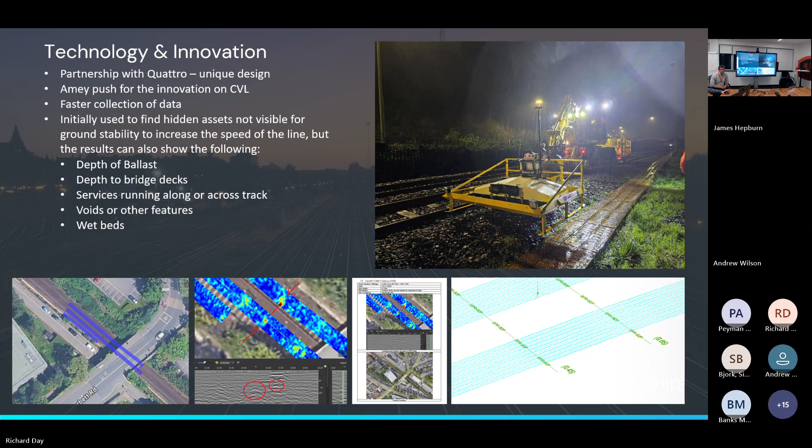One of the main reasons for that development that Mike was just talking about is the amount of limited time that we're actually getting on track now. The amount of time we get in possessions is becoming so short. In some areas, we get as little as half an hour, maybe, other areas, particularly around Bedford recently, you're lucky to even get an hour and a half, 2 hours on some of the lines there. So there's a real push to collect as much data as we can in that time.

From a client side of things as well, we're also hearing a lot of talk about a minimum viable product, about cost cutting, what's the minimum amount of information they need to be able to get the job done. The whole survey-once-use-many-times approach is maybe slowly going by the wayside, possibly.

This has led to other interesting developments with the Amberg trolley systems we're using, because the decision between how much data we need and how much time we've got available isn't as uneven as it potentially was a few years ago. We've got a couple of systems developed by Amberg Technologies, the IMS 5000 and the IMS 3000. It's essentially the same kind of trolley system, but set up in different modes.

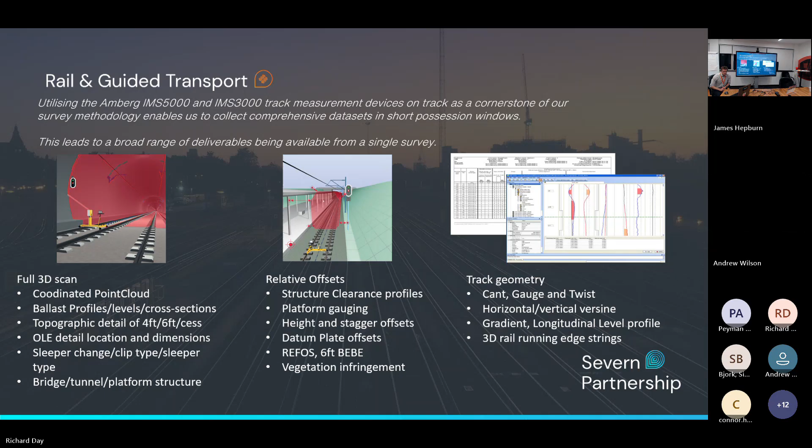So a little example of what we can do with this sort of technology, before we move on to more of it, is a project we ran in Skelmersdale. We've obviously mentioned all the survey control which we need to do traditionally - that's the basis of all surveys, like Rich said.

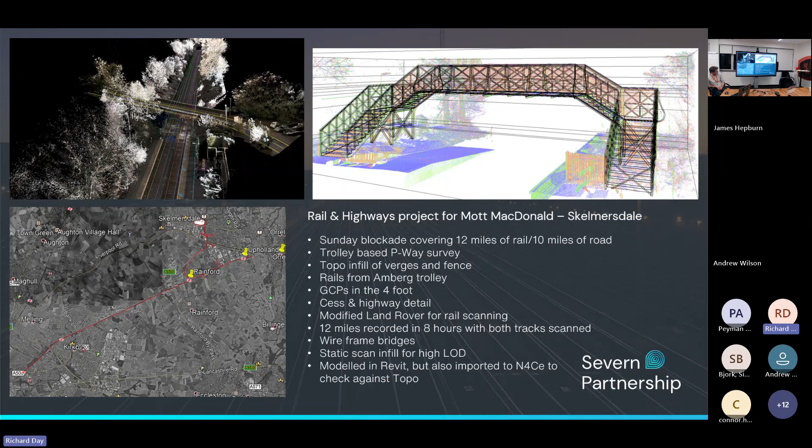If that's not right, the whole survey is not right. So once we got the control in, we managed to survey around 12 miles of rail, 10 miles of road, all in one Sunday blockade with all this kit. So you can see how rapid this data collection is.

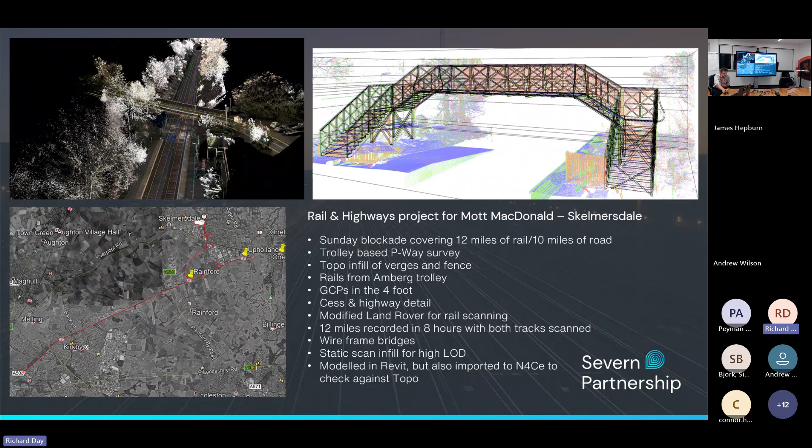We had the Pegasus 2 Ultimate - if we go onto the next slide, on that, the third image across, you can see it on the back there. We were able to scan all the roads while the possession, the blockade, was coming into fruition, and then scan all the rail as well.

Obviously that isn't for track accuracy - that was more because there's quite a few embankments and things, so that was more for the imagery and everything like that. But what we did at Skelmersdale, just because of the good possessions and good blockades, we used a number of different equipment to prove what point cloud data and these different systems can do in terms of platform gauging, track alignment, and also clearance gauging.

So for platform gauging, we used as the baseline the Bance platform gauge - the old traditional, we've all seen that handwriting. What we did then was use the IMS 5000, the Pegasus 2, and Fugro's RILA system, which unfortunately is no longer in existence, as a bit of a benchmark, and we did a whole report on it, down at the bottom.

Same with the track alignment - we used the Amberg GRP 1000, which is a total station track trolley, so that's the most accurate system, against the IMS 5000 and the Pegasus 2. And for clearance gauging, that's the 5000 against the Pegasus 2 and the RILA system.

What we found, especially with the platform gauging, is Network Rail wants to see the platform gauge as the number one - that is the go-to, the holy grail of platform gauging, which was fine, we did it against there. But unfortunately, what we found was all the other systems didn't match it quite as well, though all the other systems matched each other very well.

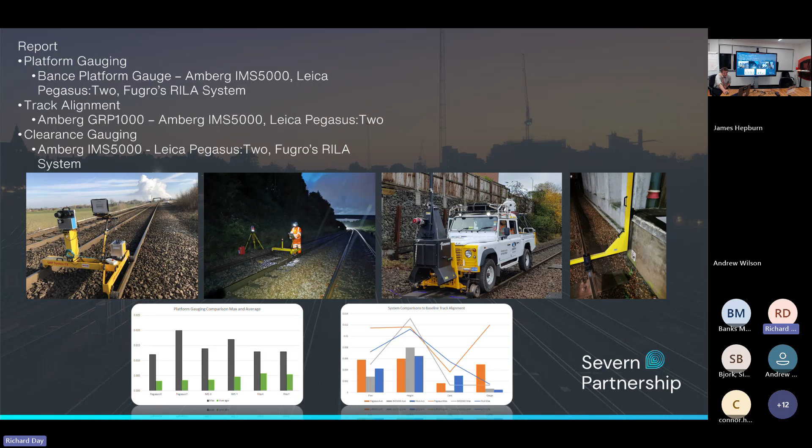So I just thought we'd go a little bit over highways and bridges. It's not necessarily on track, but it's a lot of assets within Network Rail, through over bridges and things like that. Like we mentioned, we're still very much focused on limited time, boots on the ground, trying to collect the large data sets and bring it into the office into a safer environment. But again, even with highways, the first thing you've got to think about is ground control, but not as much as track.

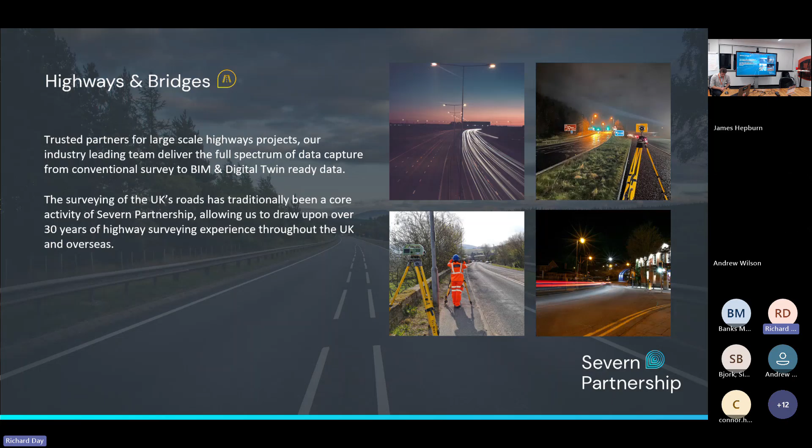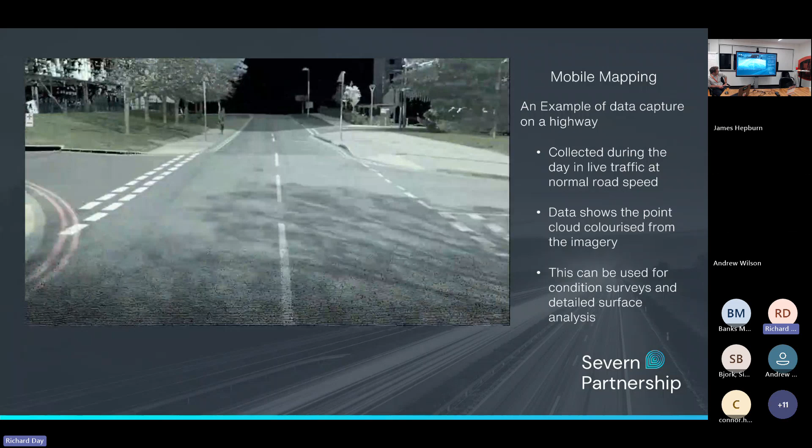If we go to the next slide - so the mobile mapping system we showed before. This is the sort of data you can collect. The colour's not as good on there, but it collects 360 imagery as you drive along, so you get a point cloud and the 360 images, which you can combine to get this nice looking data set. We can use this on track as well, which we did at Skelmersdale, for example. The benefit of using the Pegasus system is you could drive that along a road or on track at any point with no ground control and still be accurate to about 20-25 mil in global accuracy.

If you put ground control in, you can bring that down to 10-5 mil, depending on how much ground control. But the relative accuracy is always less than 5 mil, depending on point spacing, because every time it does a rotation profiler, that's one relative measurement. So if you measure from curb to curb, that's always going to be less than 5 mil. So this is the difference between relative and absolute accuracy - you've got global accuracy of where it sits in the world, so that's 20 mil driving along, but the actual measurements within that data set from curb to curb is sub 5 millimeter.

All the mobile mapping techniques, whether it's the trolley, the GPR data, or the Pegasus data here, they all essentially work on a very similar methodology. You're getting a trace of a centre line, a trajectory, to which all the other data is stitched. So everything is then relative from that point, and the only thing that positions it is where that trace is.

A benefit of this - for example, we did a lot of work down in Kent for level crossings, so there's been a lot of talk in the news about level crossings, but we managed to drive sort of 18 to 20 level crossings in a day, which ties in with the data from the track data. So we'll push a trolley at night, and then during the day we can go out with this and drive sort of 200 meters either way. If they're thinking about building a bridge or something like that, we can go a kilometer either way just in a day.

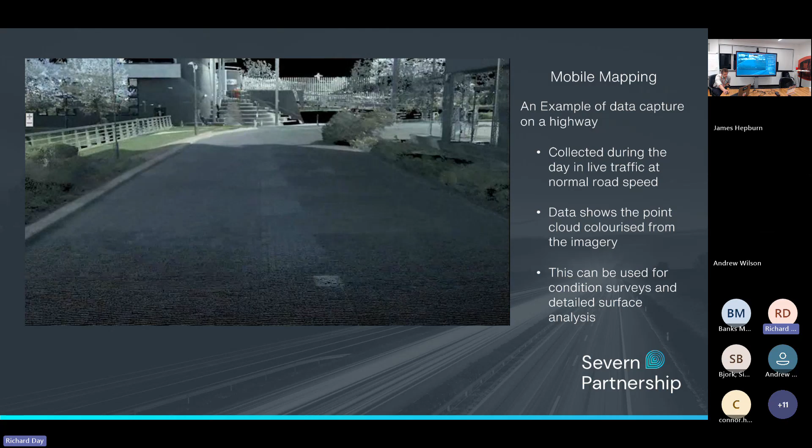Another benefit of using this system is we can also mount this on pretty much anything, to be honest. Like you've seen on our RV, we've mounted it on the back of our vehicle, but we can also mount it on a boat.

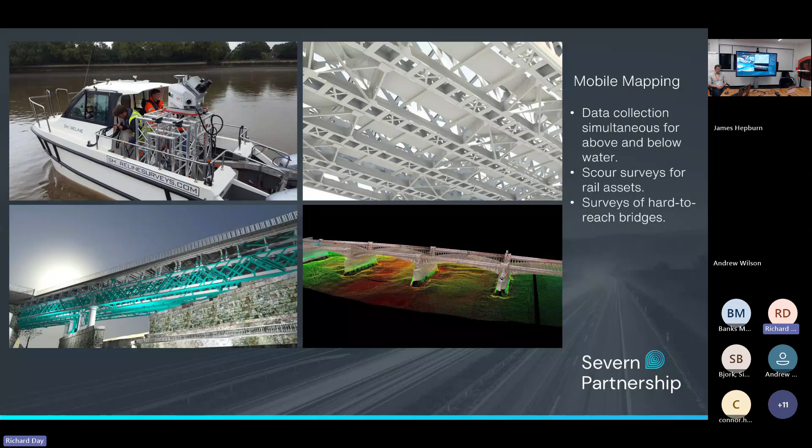So for asset management and scour surveys, that sort of thing, for us, for rail surveys - for some reason that picture's not come up. Have you sort of been a bit challenged with positioning in that itself? No, to be honest, the IMU, the inertial measurement unit, likes movement. The more movement, especially on a boat where it's rocking and moving, it likes that a lot more than being on an RV where it's nice and smooth on track. So the more movement, the smoother it can get, because it knows there's movement going on. Again, it's positioned with the GPS.

But we teamed up with Shoreline - this is Usk Viaduct, just outside of Newport Station. They wanted a bit of an inspection, which you can do with a drone - fly around and get a few images - but they wanted the whole thing modelled, with, at the time, the OLE going in. So we were able to get the multi-beam for under the water there, to see the scour around the actual structure, but also get all the point cloud data. We did multiple passes, trying to get into various locations. The profile there, you can see it's a 45-degree angle, so we can move around and twist the scanner in different positions just to try and get into all that metalwork. We were able to model that - you can see that's the model we created for it at the end.

We do have occasional issues. We did this on the Thames for a lot of the bridges, and we went past the MI6 building. Didn't realise at the time they've got a lot of GPS blockers, and the data went mental - it just went everywhere, like 200 meters. The road just went smooth and then went directly north into the air, obviously, because that's what we want - with any missiles, if it comes in, just fire them into the sky. So there are some limitations to that side of things as well. You need to know who you know, bizarre - yeah, that's it, we had to get some contacts and say, can you turn it off for 5 minutes while we do this bit.

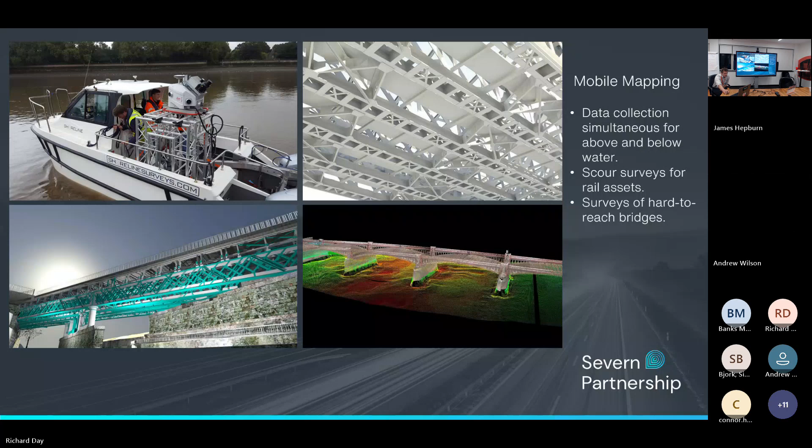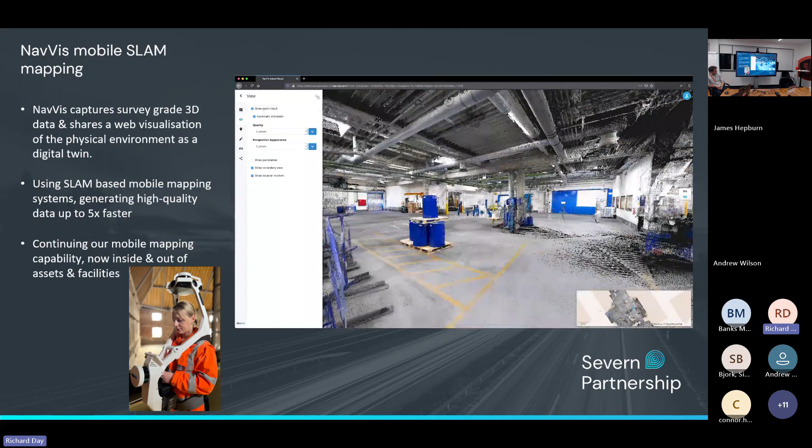So another system which is very new, starting to go with SLAM systems. This is now laser scanning, but being able to wear it on your person now and do a lot of stations. It was initially built for manufacturing, but we're starting to see benefits of using it - for example, in a lot of stations, that's definitely a massive benefit for it. But also using it in surveys on highways where there's probably a bit more theft, for example, being able to reduce that down by being able to just walk around, laser scan, get a 360 imagery, and you've got all that at once.

Another benefit of being able to use this is you can host this data online. So you don't need the software anymore to be able to use this point cloud data. If you want to use it in your own software, you can do it off the online portal and export the point cloud and use it for whatever you want.

You can use a shared login for this, and we can set you up on your own login and use that as a health and safety tool as well. So if you've got sites being built, you can put points of interest in where fire exits are, where fire extinguishers are, that sort of thing. We recently did it at Manchester Piccadilly for the relay rooms up there. We've been walking around and we can instantly share that data with about 80 people straight away.

So this isn't manually processed anymore, this is processed in the cloud. So this is where it's starting to move with the point cloud data.

So SLAM, let me remind myself what that stands for - simultaneous localisation and mapping. Basically it stitches itself to itself. So as you're walking around, you're doing a lot of figure of eights, overlapping yourself a lot, going around like that. So it uses features in itself to map itself.

But you can also tie it down to control, so as to a snake grid for example, any localized grids. It all depends on the accuracy required. If you need slightly lower accuracy, then it's good enough - if you're talking 10, 20 mil-ish, it's fine, you don't need control to do it, it can just orientate itself for what you're doing. But if you want the traditional accuracies of static terrestrial laser scanning, no problem, you can tie it down to control.

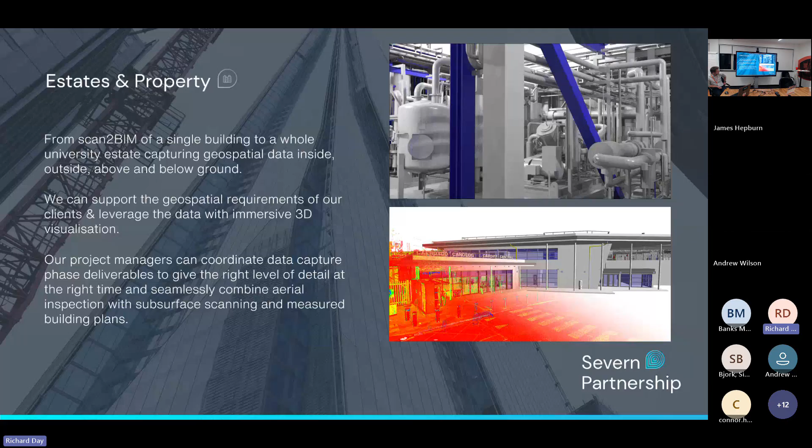An example, quite a complicated one - at the top right there, we laser scanned and modelled a Heineken factory, which was a nice job for the people over there. You can see the level of detail you can model to with the scan data we've got - every pipe, every little element. It depends on what level of detail you want, we can model to that level. You can go as simple as just walls and windows, or we can go right through to every bolt if you really needed that much detail. Again, it depends on the deliverables you're looking at.

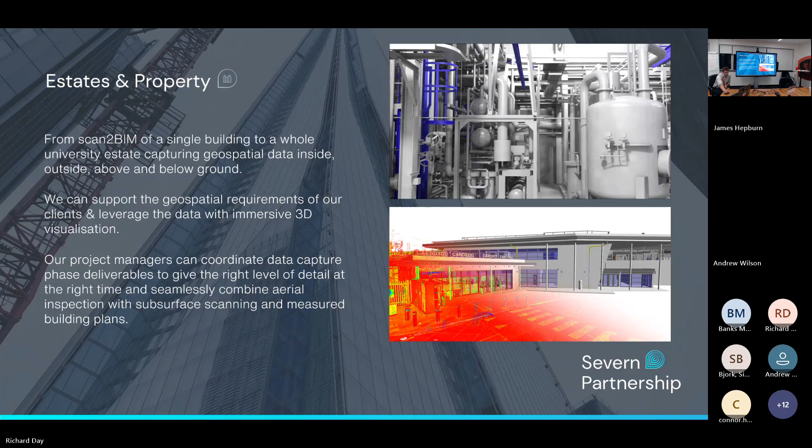So a bit about utilities tracing, which is what we mentioned before.

The problem with utility surveys is there's never going to be that much technology where we don't have to lift covers and trace them. I can't foresee anything being that advanced to do the actual physical and accurate tracing. GPR's obviously come a long way, and you mentioned drones and things like that - that will go ahead. But the actual accurate tracing, I can't see a way around it.

We have done culverts in the past, large culverts, using, instead of sending people down there for confined space, Elios drones, which is like a 300 mil ball almost that you send in there, and that can model culverts. We've done that quite a lot on Transpennine route upgrades around the likes of Huddersfield Station, where we can fly in, get the data we need, model it, and then fly back out again.

The limitation on that is if you send it down, it has to be a clear line of sight for signal, and there's only a 10-minute battery. That drone is tens of thousands of pounds, so if it goes around the corner, you've lost it, and you'll never see it again, basically.

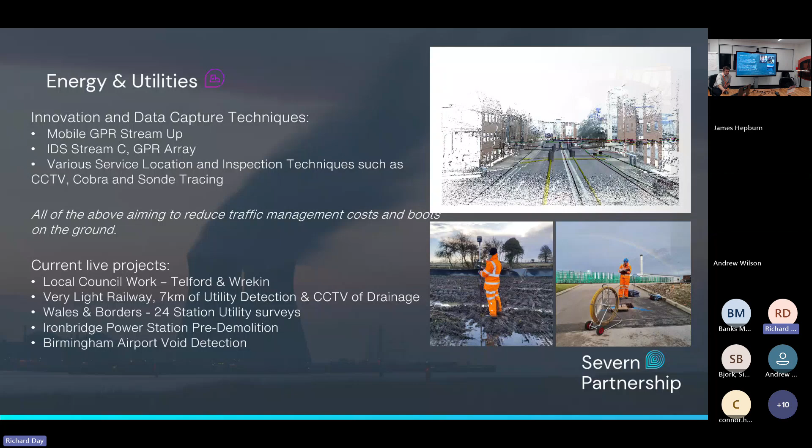So a little bit on the environmental background. We mentioned before Dawlish - we did all the survey work for Dawlish after it was wiped out a number of years ago, probably 10 years ago actually, it's the 10-year anniversary. Just wanted to bring up Dawlish because it was a great example of bringing all our services into almost one package for this job. We did a survey out to about 5 kilometers out to sea using the boat, just so hydrologists could work out how the waves would come in and hit the sea defense.

What we also found was we used the GPR on top for any pipes or services when they're building. We used the Pegasus on the back of a quad bike, another service, so we could drive a few kilometers down the beach where the sea defences were and use the GPR system there.

What we found was that the sea defences used to be full of sand when built, so when waves hit the wall it would absorb the impact. Over time it was filled with concrete, so the impact was straight on it, which started to affect the buildings behind, causing cracking to appear. So we started finding that.

One thing I discovered doing the night shift there was that the ballast is glued down. I tried to kick some ballast off a catch pit, and it went over my head because I didn't realise - it was all washing out, that was it at the time, when the sea was overtopping. But no one gave me any warning about that when I went on track, which would've been nice at the time.

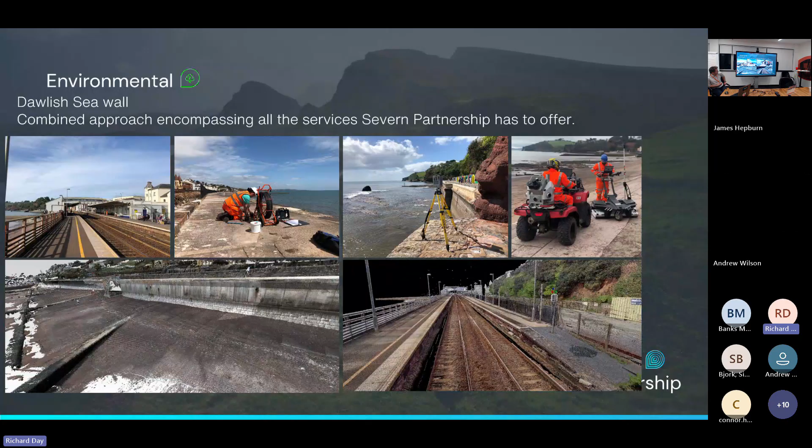So to move on to a slightly different topic now: with all these different data sources coming in, you touched on it a little bit there, they all need to link together somehow. And for the records going into the future, so that data can be used many times, they need to be on some kind of recognized coordinate system underneath it, so that's easily relatable to other data sources.

We've got mobile mapping data above and below ground, all the new construction works with machine control, all GNSS enabled now. Everything needs to be relatable to the wider world - projects aren't local anymore. And the key bit of information to that, which sometimes flies under the radar a little bit, is the coordinate systems for your projects. That really is one of the key bits that can define how well your project goes, whether it runs smoothly or runs into trouble later on in its life.

So we're just going to look at some different options, because it's not something widely spoken about, but we thought it might be worth touching on briefly. We've got loads of other information on this, so if there's more information you want on particular bits we can look at it, or if there's any questions as we go along - it can be a bit of an abstract concept sometimes, so feel free to jump in and ask.

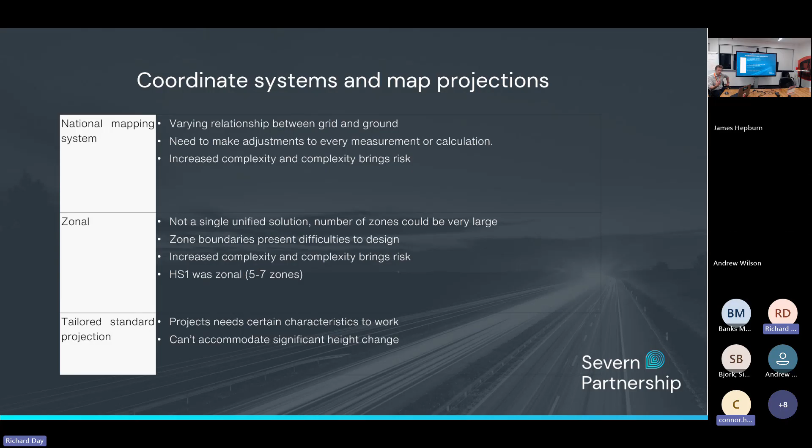And we're now - well, at the time, Jonathan Iliffe was the professor there. He came up with the solution that we're going to talk about next. He's since retired, and we're now working in partnership with UCL to develop snake grid services and offer them out.

So Jonathan came up with the concept of a snake grid. Now, has anyone worked with snake grids? Had a lot of familiarity with them at all? I think some of the challenges with keeping it accurate enough, yeah.

Yeah, so what a snake grid is, it's a winding projection. So it changes the parameters as you go along. So you give us a route and we will tailor that projection, and it twists and turns and follows the rough trend of where you want to go in plan and height to create a low distortion corridor where the scale factor and the distortion in that grid...

...is below survey accuracy. In effect, you can consider it to be 1-to-1. So if you draw that high-speed transition in the office with very particular geometry, when it gets set out, it will be set out exactly as you want it to be. There's no interface, there's no corrections as you move between the site and the office. It is completely seamless - what you see and measure in one is what you see and measure in the other.

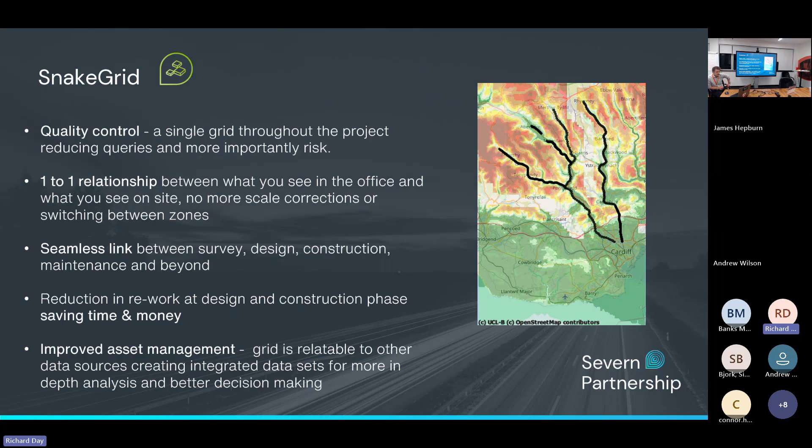And we're touching a little bit there on asset management, because it's a known, definable coordinate system, you can easily flip that into another coordinate system elsewhere and overlay data sources. I think the next slide touches on that slightly as well.

And I think there's just a little bit there about—you just provide us the details of where you want the grid, where you want it to be covered, and we streamline your workflows, reduce risk, and give you confidence in your data moving back and forth. I'm sure many of you know that pretty much most of the main lines in the UK are covered now with Snake Grids, but I was talking to Bogdan the other day, and it's almost that projects over a certain size, it's almost mandated that you have to be working on a Snake Grid now because of the benefits it brings.

Monitoring has come along quite far in the last couple of years. That's monitoring for movement, temperature, noise, dust, everything. Traditionally that was always done with a person with a total station shooting targets over and over again to look for movement. But we're now moving on to more boxes, tilt sensors, remote monitoring.

The benefit of this for larger projects is you can stick down little boxes, very tiny, about that sort of size. You can stick these on sleepers, or on posts in embankments to review monitoring. These will also be sent to the cloud, so you can have readings every minute, every 5 minutes, every 10 minutes, every hour, depending on your requirements. And depending on how long you read for, the batteries can last up to 10 years.

For longer term projects, it's cheaper than sending someone out constantly to do readings. Especially in summer where you've got critical temperature readings, on Network Rail we can just put a little sensor on the web of the rail and that will constantly give you readings straight away.

We've also got little boxes that feed back to a gateway, so if one of those sensors goes down, or the gateway goes down, it will still store the data. We can quickly put the batteries back in, keep it moving, and all that data will be uploaded again. If one goes down, it can bunny hop that data between all the different sensors all the way along the track.

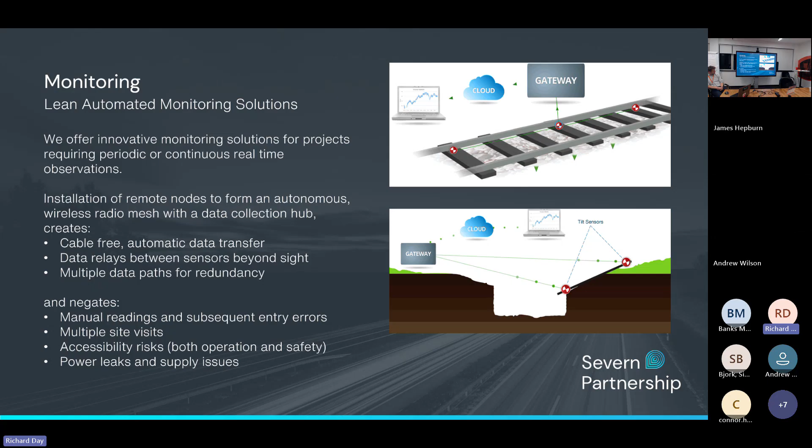So, what's the next slide? It's just a quick video showing you the different... too far. It's not gonna work now, is it?

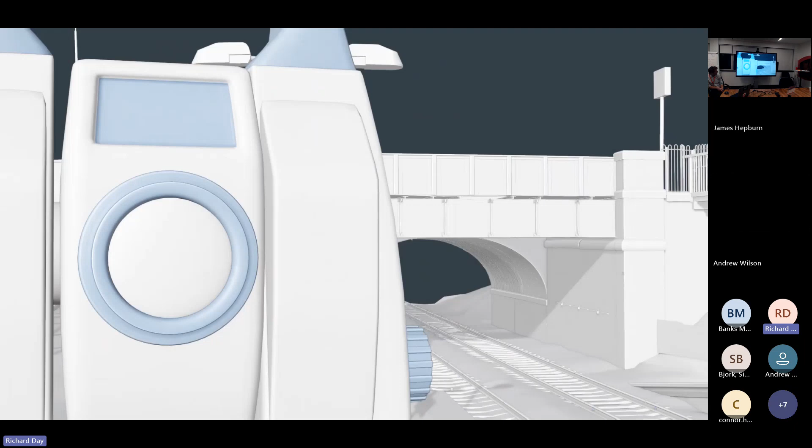So we still do the traditional automated sort of ATS systems, which can constantly shoot. A lot of them you've probably seen on HS2, but they're quite liable to being nicked at the moment. A lot have been nicked on HS2. I think 200 of them were nicked.

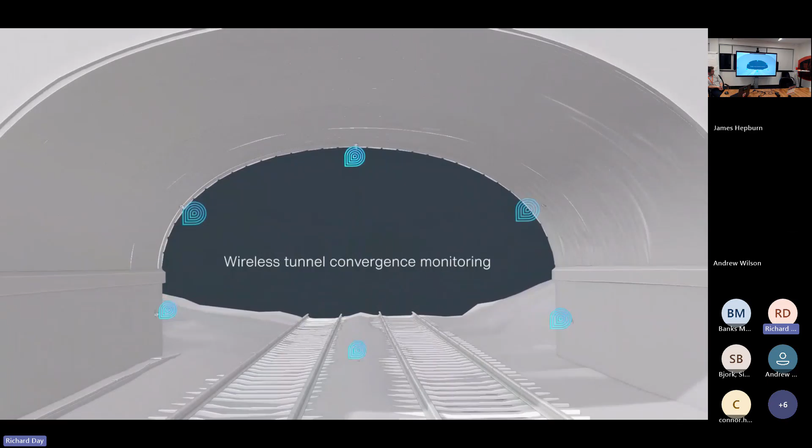Again, they're looking for movement, walls, also tunnel convergence there. They're almost like little distos, so they can show any fluctuations in the tunnel. We've been doing that on the Camp Hill lines in Birmingham, because they've had quite a lot of cranes on top of this tunnel, and it was an old Victorian tunnel. Obviously, they didn't want anything collapsing, so we've had them in there for about a year now as they're doing work above it and around it.

And yeah, in the embankments that look to move in. I mean, the most triggers we get from badgers digging them out, or people just picking them up and wondering what they are. That's a very common issue of people just picking them out and looking at them. So that is probably our biggest issue. But yeah, it's all about keeping people off site again and just doing things remotely as much as we can.

And that's about it. So yeah, we cover, like we said, rail's probably our biggest. It was at 80% of our work, but we did diversify as CP7 sort of closed down and recessions and things, so we're more guarded, but we do work throughout all these sectors, and yeah, a few of our accreditations there. But yes, thanks for listening, everybody.

It was probably longer than we thought it was going to be, honest. So hopefully there's a few good points in there.

Absolutely fascinating. So have we got any more questions? Any more online? No. Right, any questions from the room? So, yeah, I've been met with silence.

I've got one regarding monitoring. Are you able to monitor inside the tunnel or any other underground structure? And if so, how do you get the signal out from underground to the cloud?